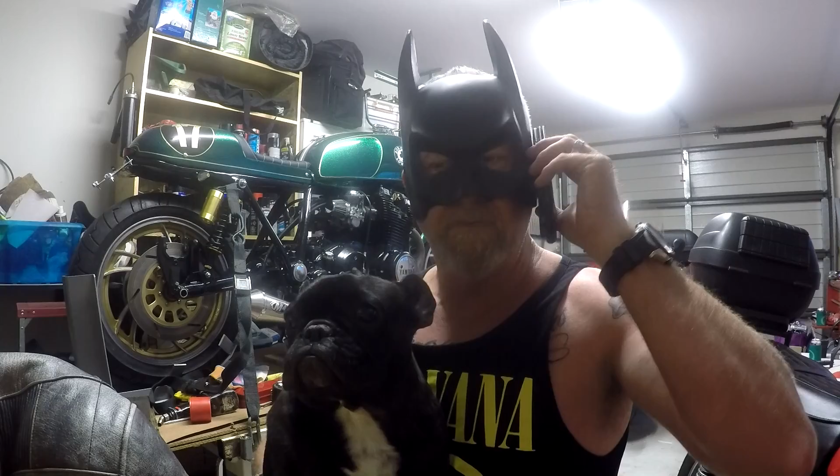No, Commissioner. Enough's enough, I'm sick of it. Bat Dog and I have got work to do. Why don't you ring Brian? He'll just be sitting on a BMW watching his cricket. Yeah, well, of course he'll be pissed. No, that's why you pay those fat donut-eating buggers. No, I'm busy. Bye.

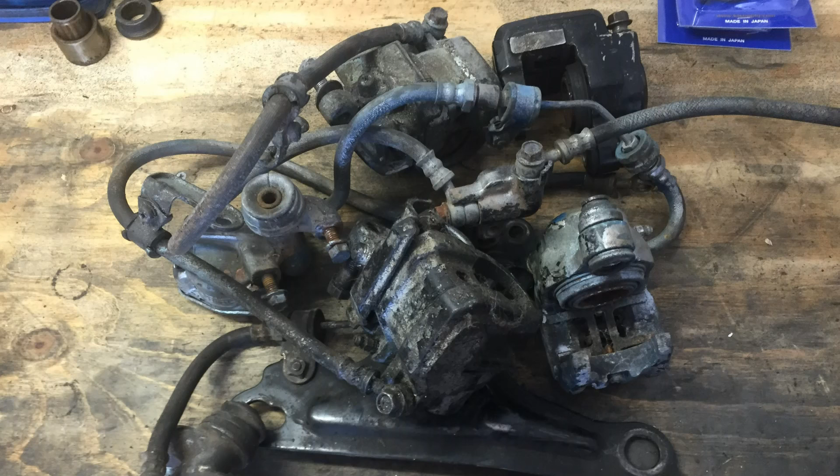Well, we finally dispensed with that clown. This pile of junk sitting on the bench in front of me represents all of the components, or most of the components, that will make up the braking system for Basket Case. Most of it came with the original bike, and some I've picked up along the journey as second-hand bits. I'm going to try and fashion it all now into something that might actually bring the bike to a stop, and I think I'll start with the rear master cylinder.

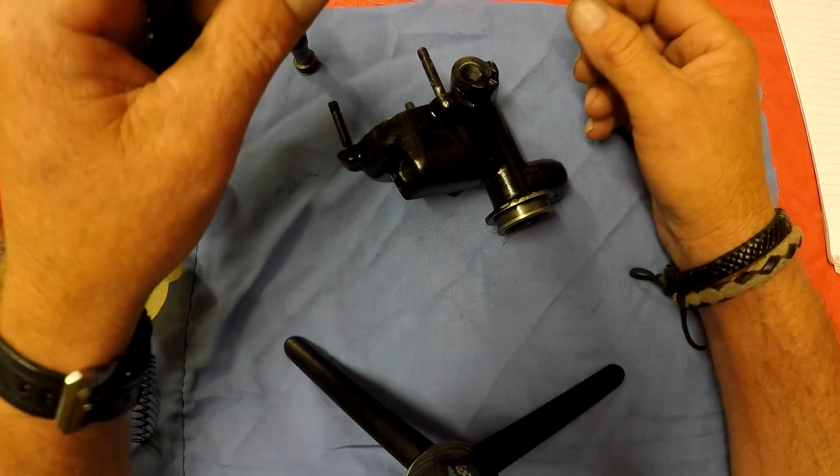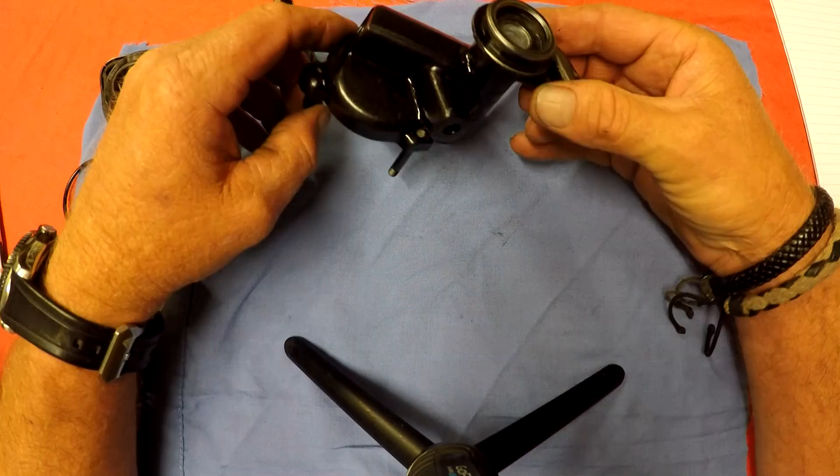Okay, I'm going to start with the back master cylinder. Now, I had two, and this one here I cleaned up. I've painted this, but it was pretty good. It was sealed, it still had oil in it, which is a good sign. The bore was a little bit gangrenous, had a bit of oxidisation, a little bit of rust, and I gave that a bit of a quick clean up just using some 2000 grit wet and dry paper.

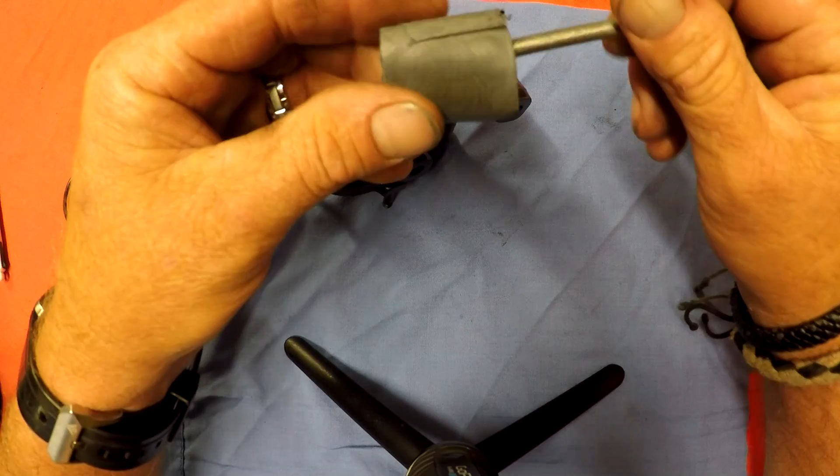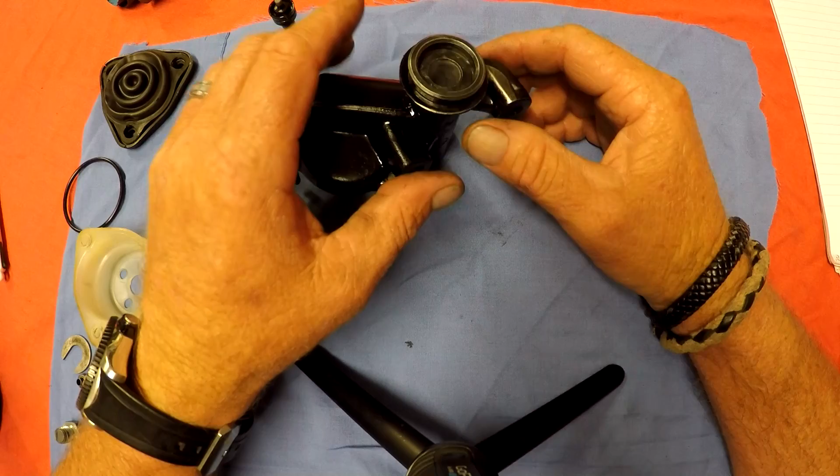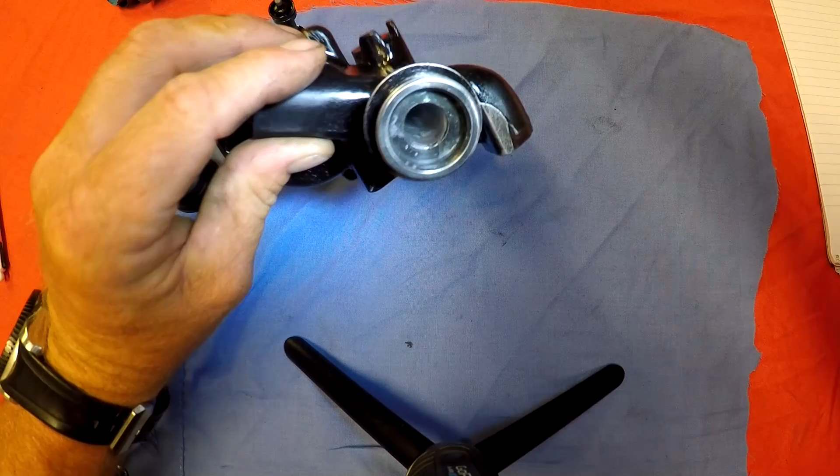I cut a bolt, put a slot in it with a hacksaw. Let's take this apart and show you - with a hacksaw, and just wrap some wet and dry on there for some lapping paper, and a bit of CRC, gave it a good little hone. So that's come up fairly nice now. I'll just give you a look in there. It's nice and smooth, still got a few stains in it, but it's pretty good considering.

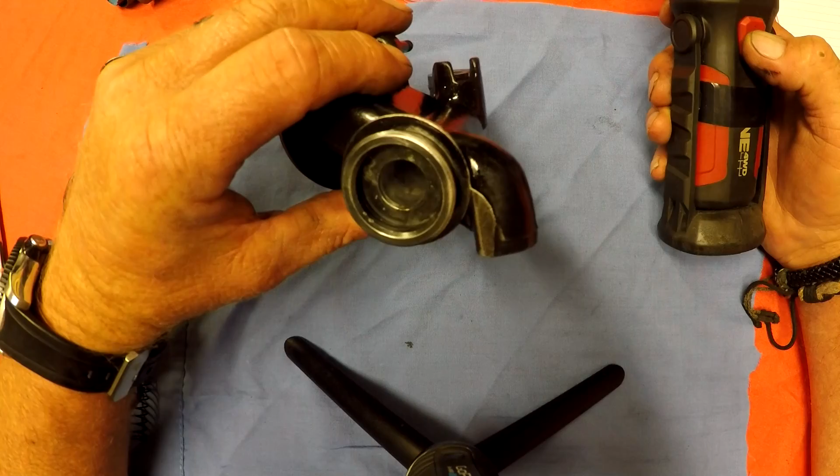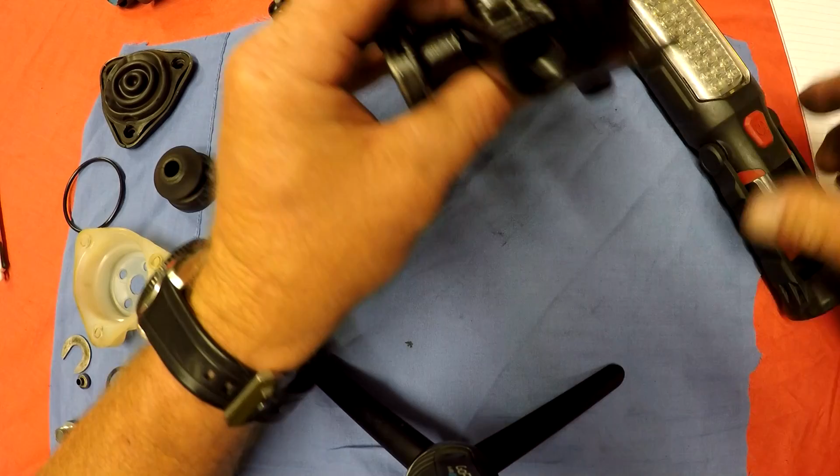It'll be fine to use. Now, quick tip about master cylinders: if I shine a light looking down that hole there, up through the bottom, you'll notice there's two holes in there. Pretty sure you can see both of them.

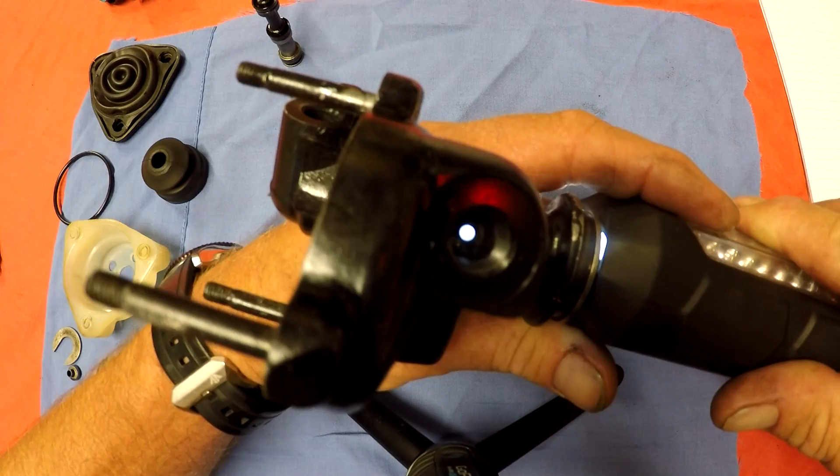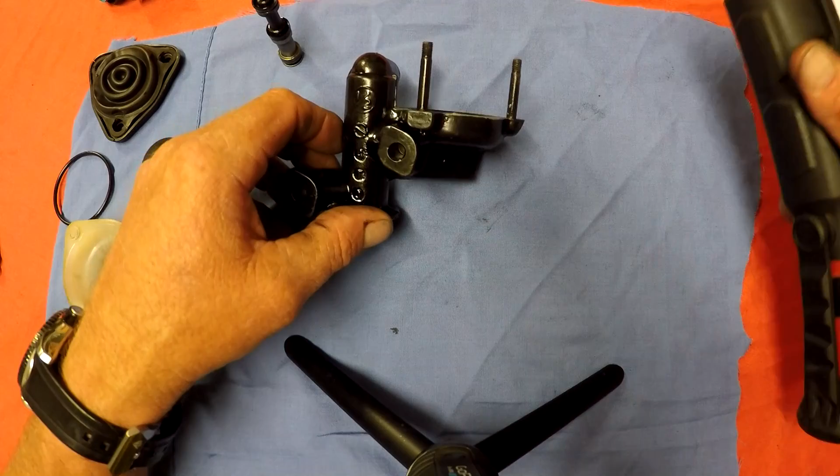One is a large hole, which is used for refilling the chamber, and there's a smaller hole in there, less than 1 millimetre in diameter, and that's the vent port, called by many names, but the Society of Automotive Engineers, SAE, deemed it worthy to call it a vent.

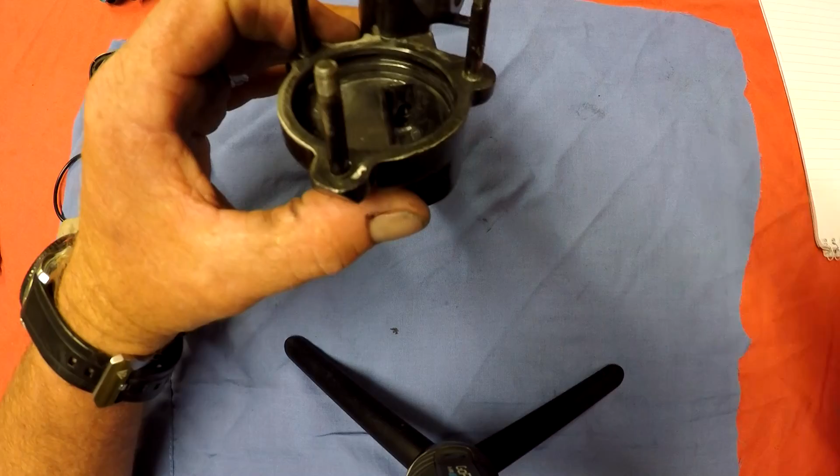So the idea, as he sits down in there - that's the bottom hole of the two that you can see there - if he blocks up, it doesn't allow the pressure to release from your brake, and you end up with a locked up brake. So if that's a symptom you're having, you need to get a guitar string or something and clean it out. The steel guitar strings work well.

So anyway, I'm going to be resurrecting this using second-hand parts because I don't have a kit for the rear cylinder. I've got everything I need here.

Like I said, everything's been cleaned, it's been painted, and the buckets have been curing, or I've been prepping them by sitting them in brake fluid, and they're nice and malleable now. You need to rest them for about 15 minutes in the brake fluid.

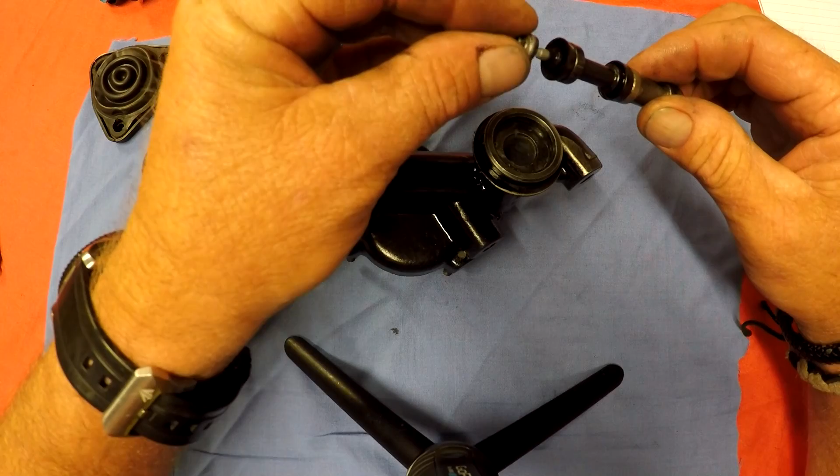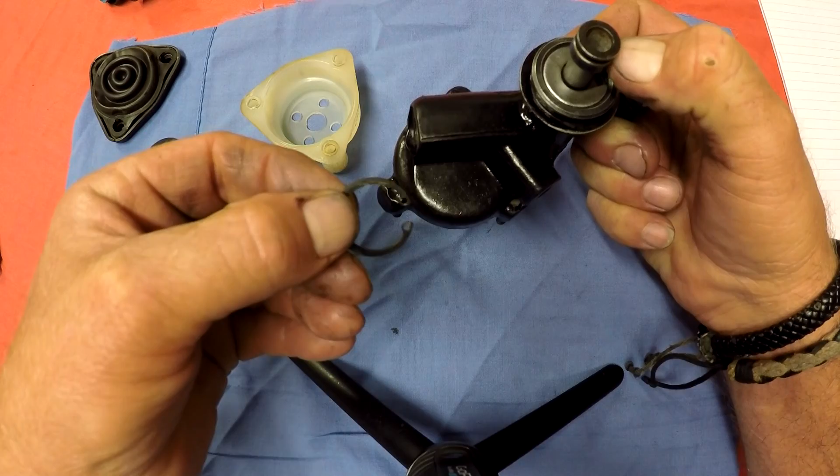So what we have first of all is a spring, and there's a little cap that goes over there. You just sort of gently work the buckets in, so you get them started in the bore, and we pop in a washer and the circlip. Just check that circlip - radius side down, flat side against the load side, the groove.

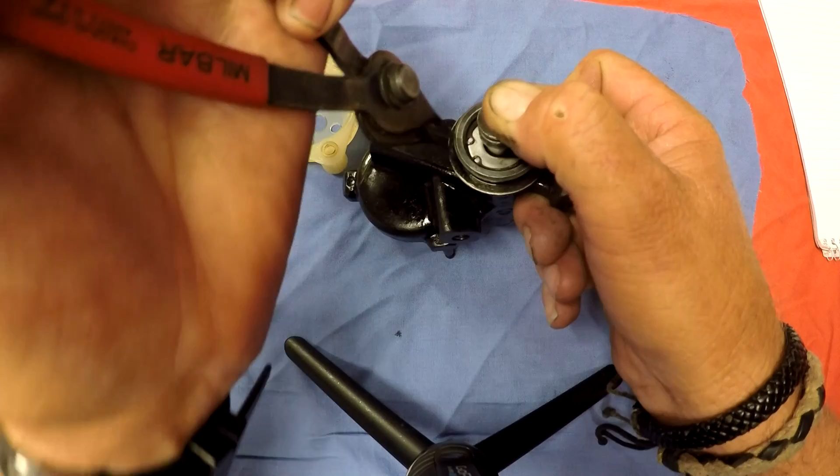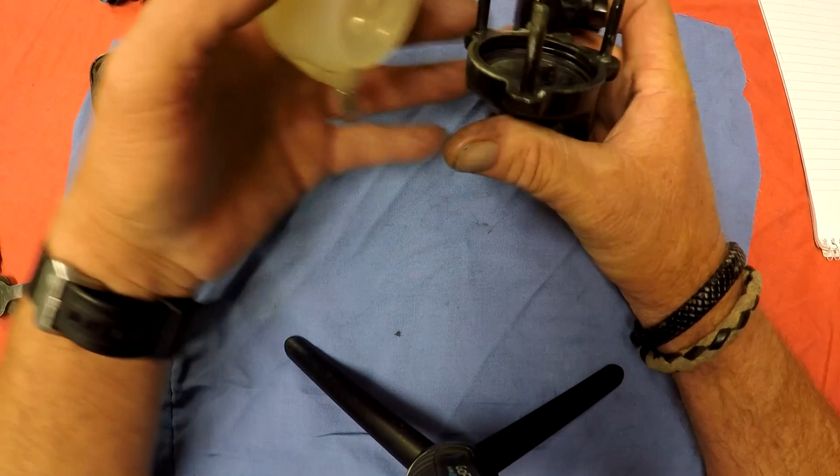There's also a rubber boot that needs to go on, try and keep the road muck out of the system. Alright, so that's the piston assembly.

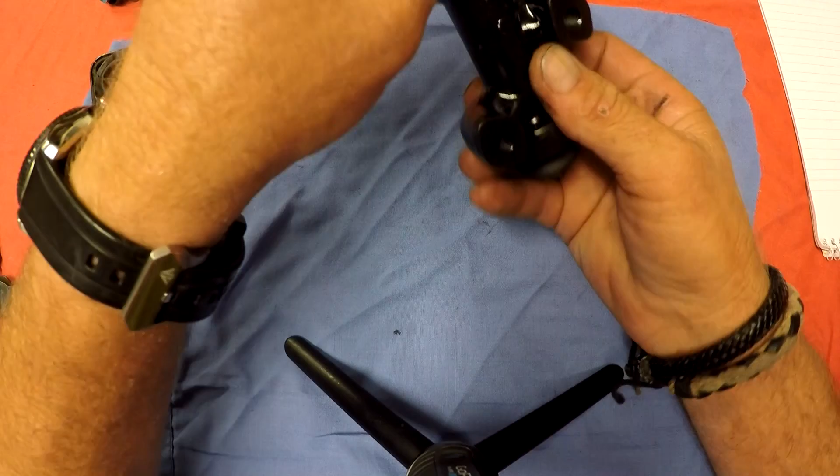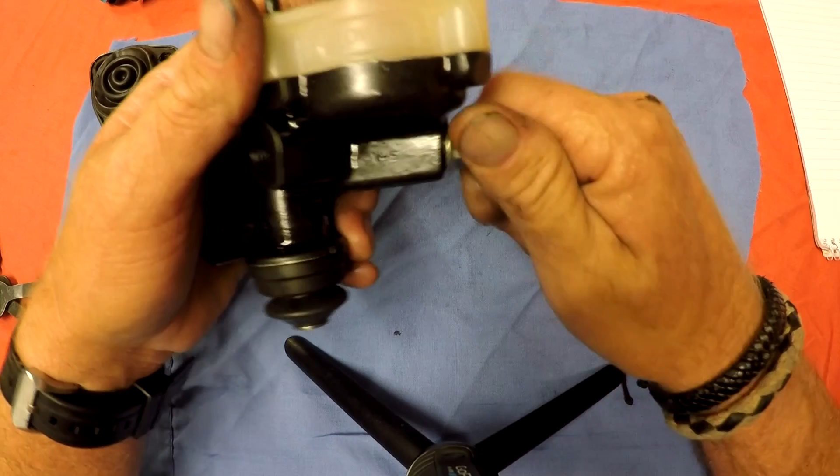This guy, I've also got a little bit of lube on. You just got to be careful that you don't get brake fluid everywhere - the stuff's toxic and it will eat paint, it will eat your clothing. It's a polyethylene glycol mix, and it's highly toxic, so if you're disposing of it, you need to make sure that you do that responsibly.

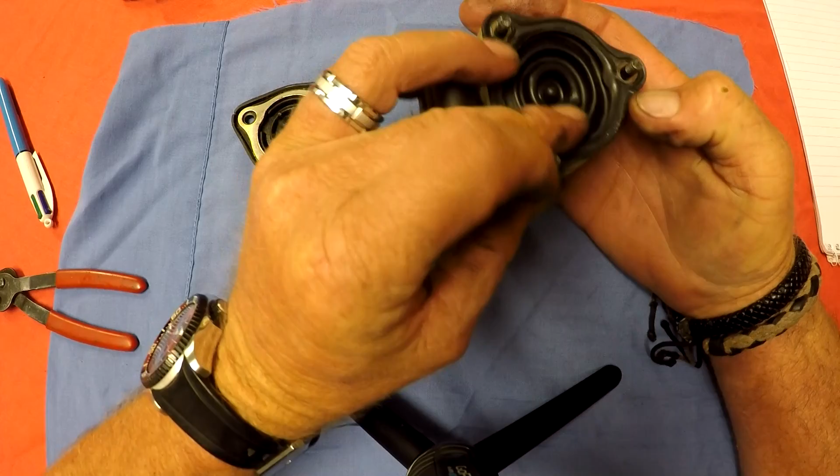Alright, so when this mounts on the bike, it mounts thusly, and I need to be able to read the level indicator, so this guy can go on there. Push him down into the O-ring. Right, it's a little bit proud, but that'll pull down with the cap.

There is also a plug that blocks off the end of this bore here. Just need a 14mm spanner for that.

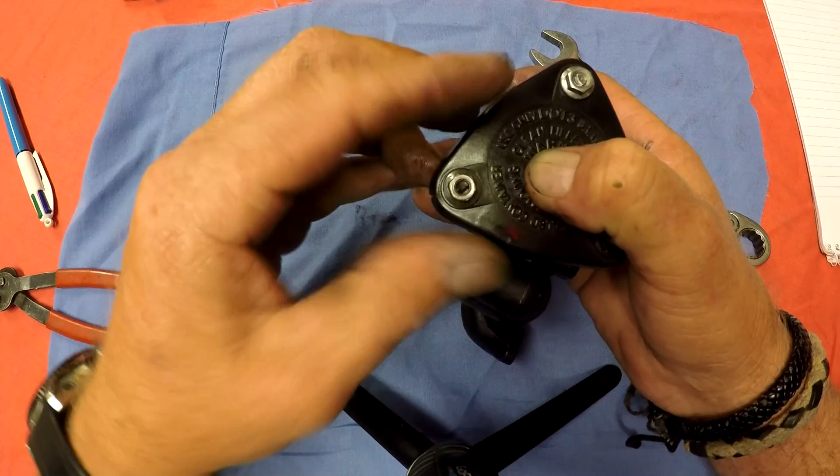And then there's a cap with a rubber seal. This rubber seal is a little bit knocked around, and it looks like it might have been put on there not so carefully at some stage. You just got to be careful that they sit down over those plastic bosses on the lid, because what you don't want is holes like that where you could potentially have fluid leaking out, or more importantly, getting moisture in there.

Yes, just got to make sure they're all down, and they are, and pop the cap on. So that's ready to go, and I obviously need to put fluid in it, and I'll be putting this together with the master cylinder and bleeding it before I mount it on the bike.

Alright, so I just wanted to give you a quick rundown on what makes up the rear master cylinder. Like I said, there's not a lot in them. Let's have a bit of a chat about them. Okay, we'll try and keep this as interesting as we possibly can, I guess.

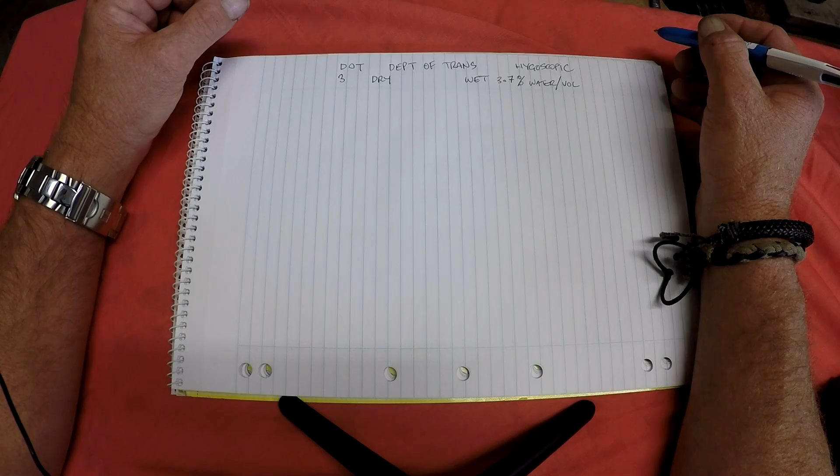So it's essentially the 3 and 4 that you'll see refers to the boiling point. DOT3 has, when they talk about brake fluids, two different types of boiling points. One is a dry boiling point, and one is a wet boiling point. Now, the dry boiling point is essentially brand spanking new fluid in a sealed container, or it's been taken from a sealed container and put into a system.

So it has little to no moisture in it, because this stuff, this polyethylene glycol, is what they refer to as hygroscopic, which means that it will absorb moisture out of the atmosphere, and it does it very efficiently. So, dry boiling point and wet boiling point.

The wet boiling point refers to, well, they had to draw a line in the sand, and they said at 3.7% water per volume is what we're going to measure as the wet boiling point, which means that it's absorbed water essentially out of the atmosphere into the fluid, and at 3.7% water per volume is what they're calling the wet boiling point.

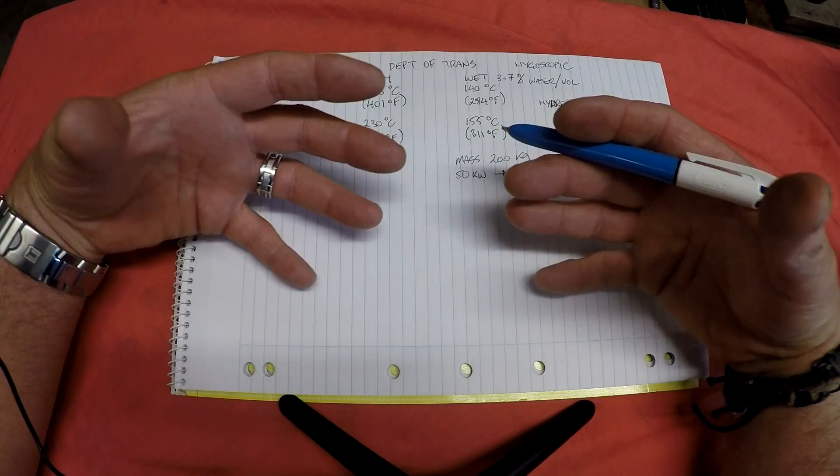And no, I don't have a photographic memory. I actually had to look up these Fahrenheit conversions. So that's DOT3, and when you consider water boils at 100 degrees Celsius, that 40 degrees isn't a whole lot more.

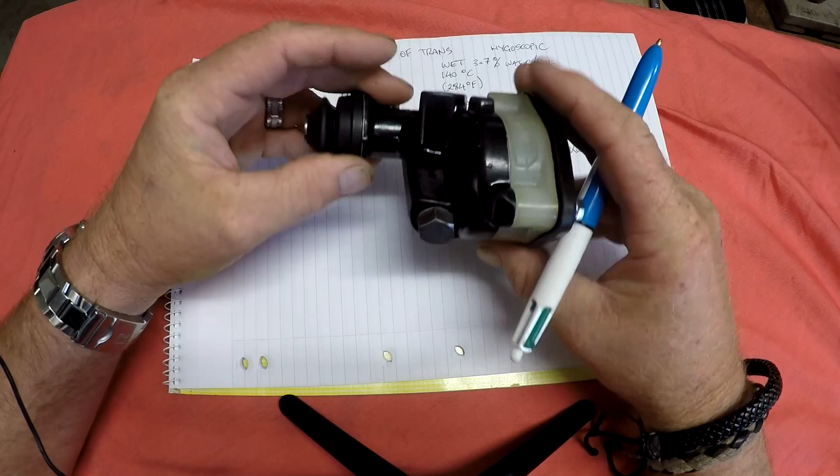We go to DOT4, and DOT4 has a boiling point of 230 degrees C, which is 446 degrees Fahrenheit, and it has a wet boiling point of 155 degrees Celsius, which is 311 degrees Fahrenheit, which is a marked improvement.

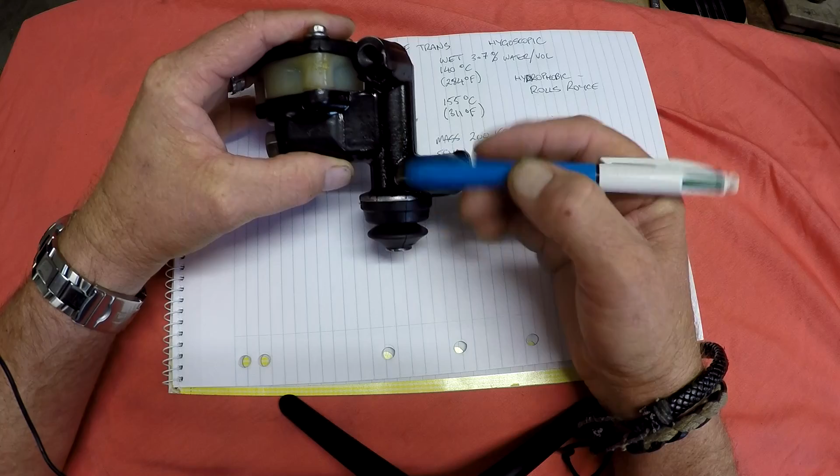You can buy up-spec versions. I think they have some sort of additive, I can't remember what they put in them, but this is a Super DOT4, and it has a dry boiling point of, I did read it here somewhere, 280 degrees Celsius. So that's even better again, and that's what I use in my Ducati. So yeah, that's what all that's about.

There are some hydrophobic fluids, which means that they don't absorb moisture, on the market from people like Rolls-Royce, and very expensive stuff, probably out of the reach of you and I.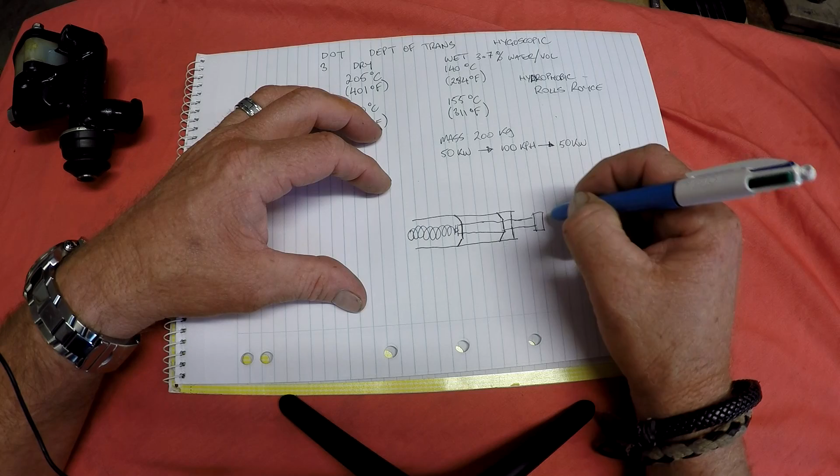So we're sort of going to go down to the local auto parts supplier, and we're going to purchase a brake fluid that is a DOT3 or a DOT4. My preference is a DOT4. I think most vehicles will specify if they need a DOT4, and if you've got some ABS systems that will generate a lot more heat, or motorcycles where the manufacturer believes there's going to be a greater amount of aggressive braking on that particular type of bike, then they might specify a DOT4. Personally, for me, I'll always buy it.

So where does the heat come from? How do we boil it off? Well, of course, we have friction at play.

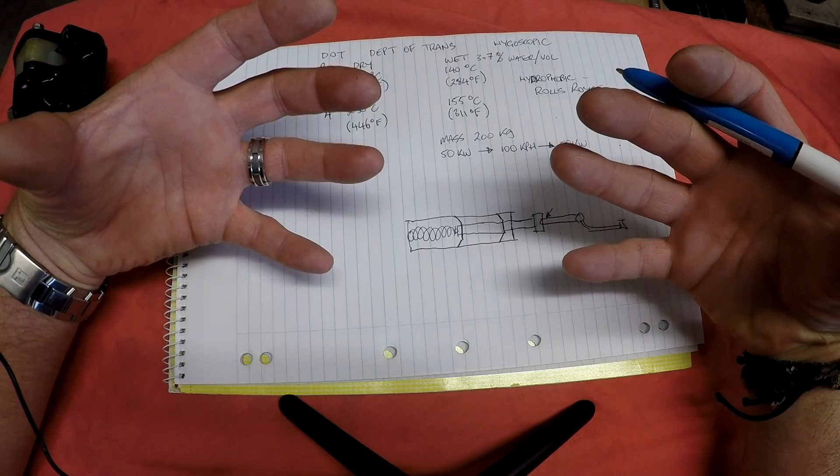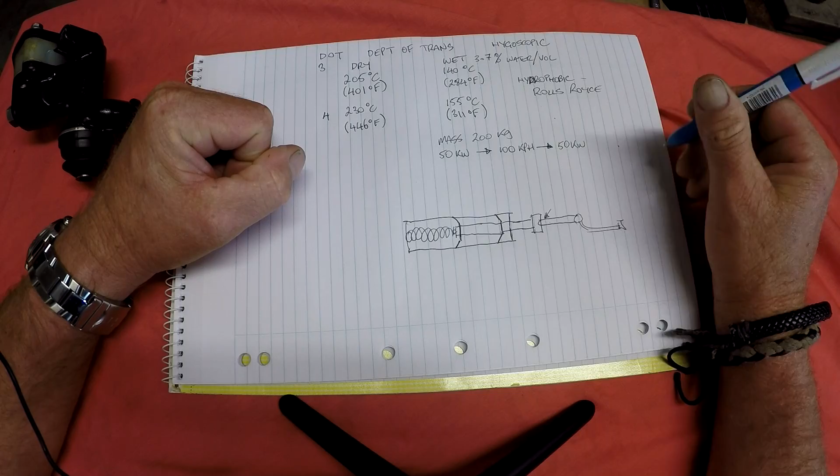So we have a motorcycle which is at rest and has a mass of about, let's just pull figures out of our head here, say 200 kilos. Probably more than that by the time you put a rider on there and what have you, and a full tank of fuel. We want to accelerate that bike up to highway speed. So let's just say, for example, and these are purely figures I'm just pulling out of thin air, just say we need 50 kilowatts of power to accelerate that bike from rest to 100 kilometers per hour.

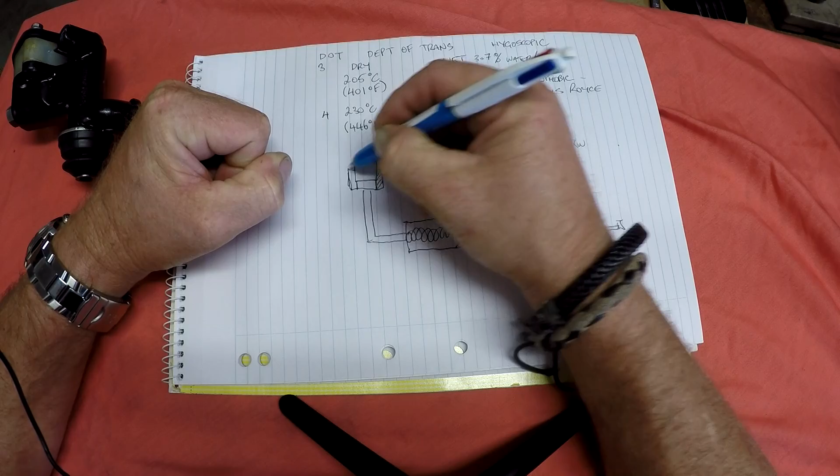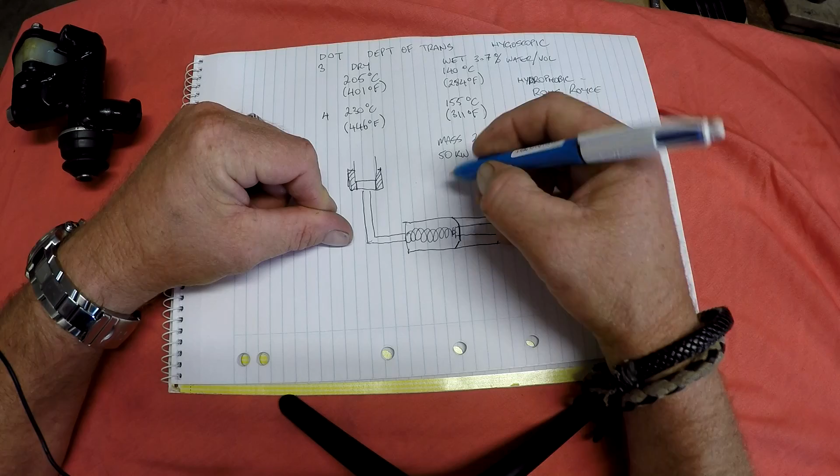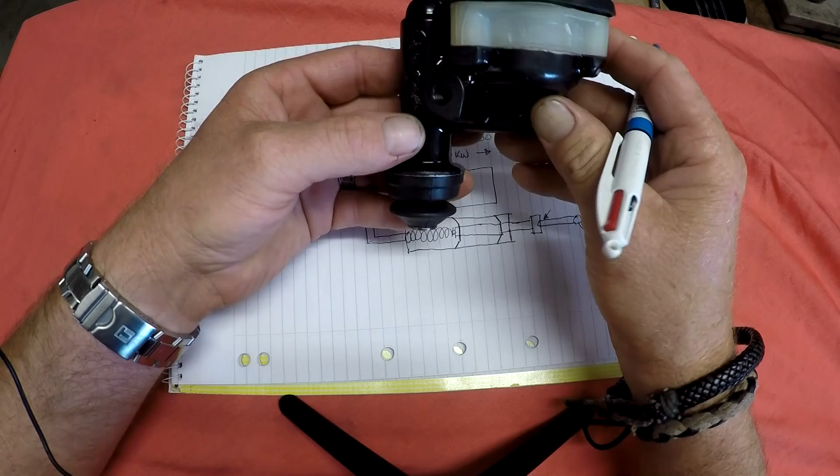If we wanted to bring that bike back to rest again, down to zero, we would have to apply 50 kilowatts of power to bring it back down to rest in approximately the same time. So that energy we apply, that 50 kilowatts of friction energy, is transferred into heat, dissipates mostly out through the wheels and the caliper. The disc rotors out into the air and is cooled, but a good portion of it is put back into the fluid and it heats up.

So it's probably enough waffle about brake fluid. But we need to talk about master cylinders, which is this guy here.

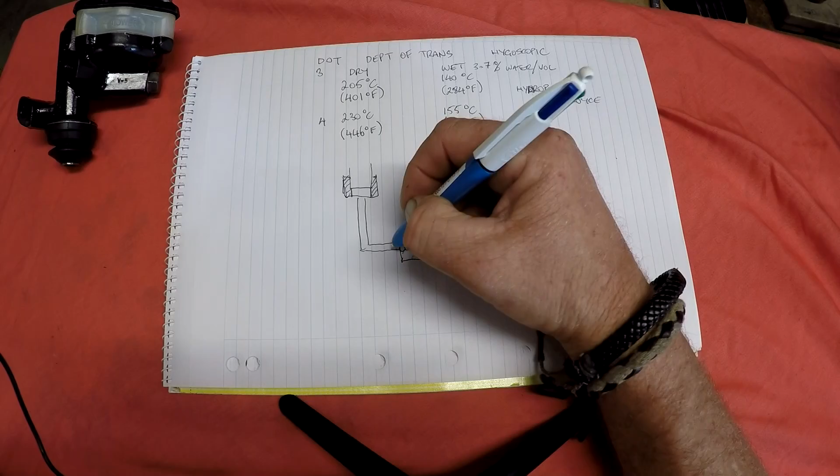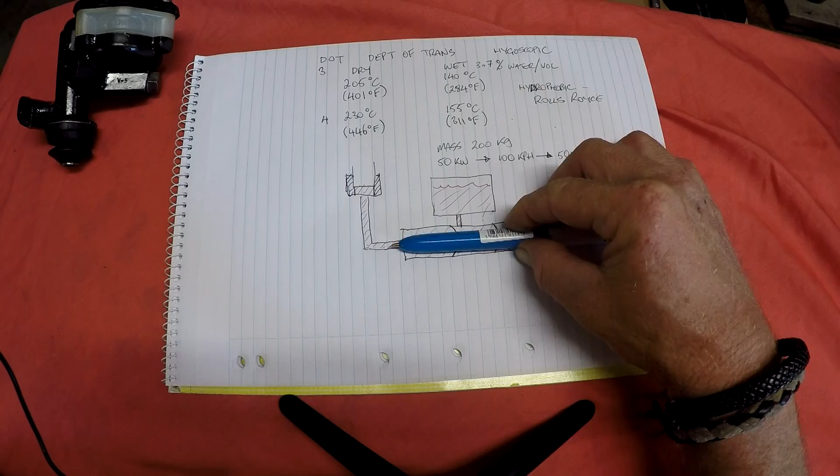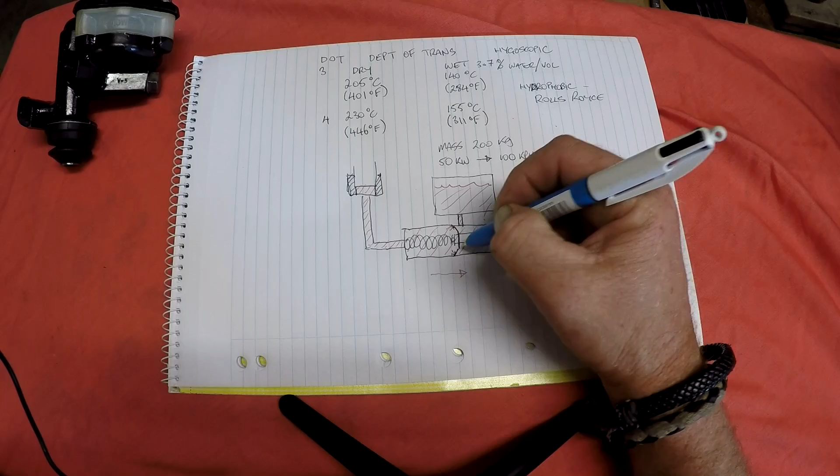The oil sits in this reservoir and floods into a chamber, and we have a piston that operates up and down in here, which we saw during assembly. That bore, that cylinder the piston operates in, sits thusly, and inside there we have our primary piston seal, which is a cup seal, attached to a piston. In the case of the XS1100 and a lot of other motorcycle master cylinders, there's a second cup seal, and the piston then extends. There's some way of retaining the unit, in this case a circlip, inside the chamber so it doesn't fly out, and we call that assembly the piston assembly.

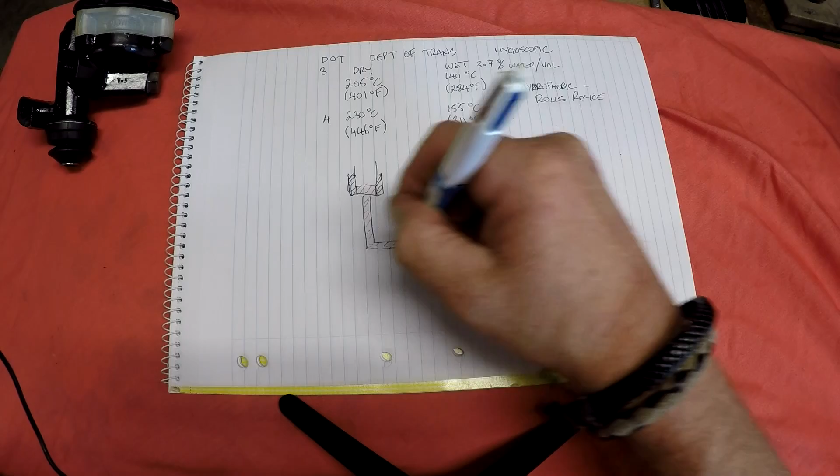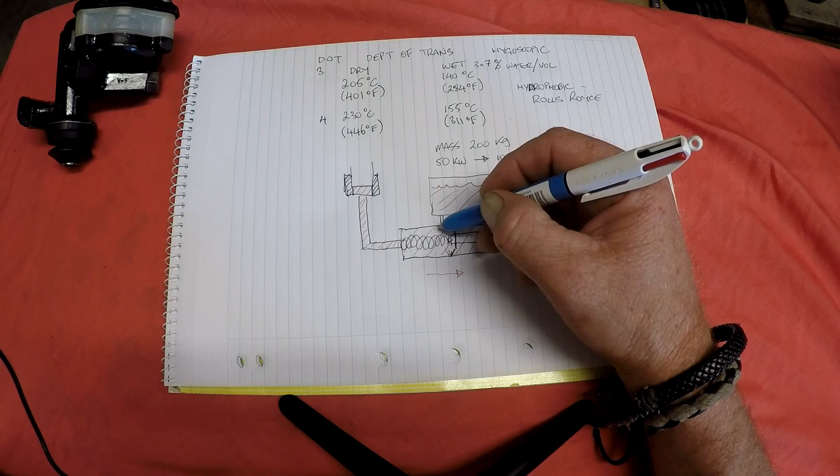On the other end of it we have a spring, and the spring's job is to bring the piston back to the rest position. The rest position is very important. On the back of the piston assembly you'll have a plunger, some method of depressing it, and there'll be a brake pedal fastened onto it. It's important that you have free play set at that point where the plunger meets the piston, and I'll explain more about why later.

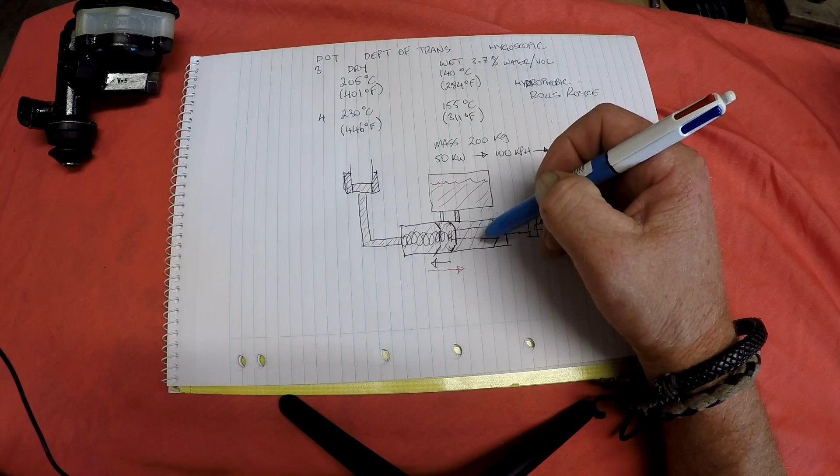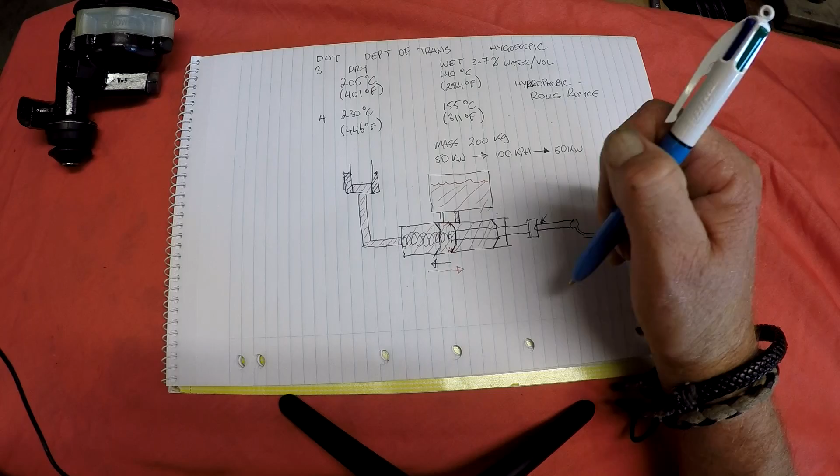So essentially, when we talk about hydraulics, technically hydraulics is water-based systems, but since Archimedes there's been a lot more discoveries, and people have developed better products than water for these types of systems, which water would be next to useless for. So we've got fluid of some type, in this case brake fluid, sitting in our master cylinder, and it's plumbed to a caliper, a brake caliper.

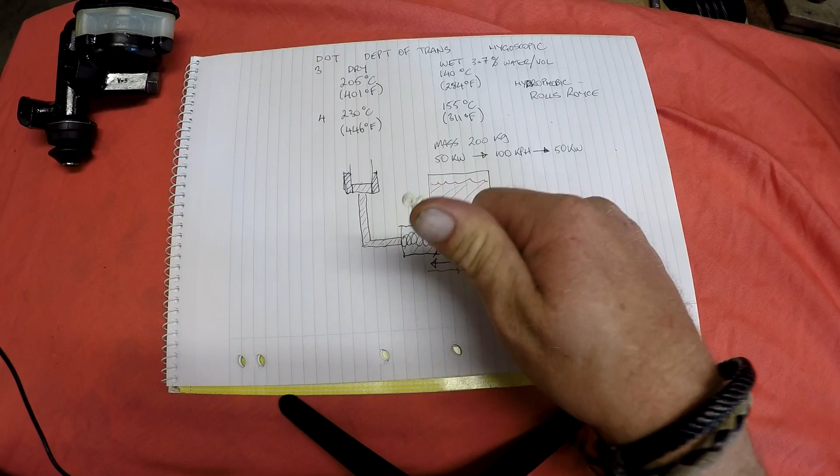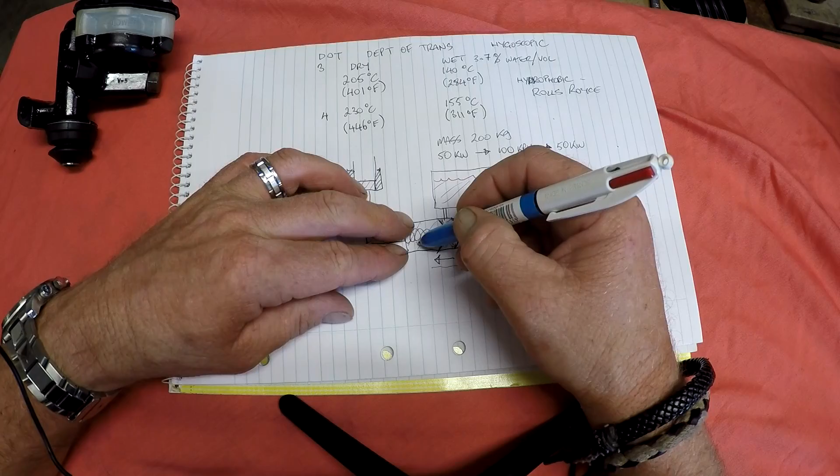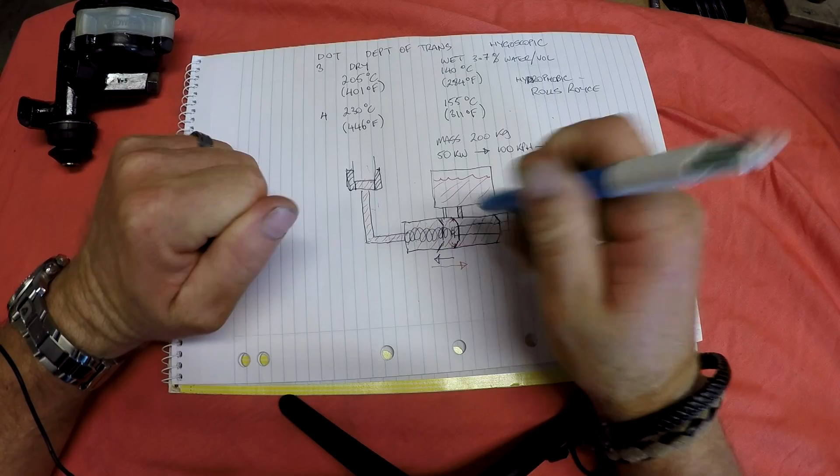Our brake caliper contains a piston, thusly. Sitting above our cylinder here, we have the reservoir for the fluid, which sits up here. Now this particular one's cast as part of the assembly. Some of them are remote mounted and have a hose going down, but all systems like this will have a reservoir, and they have a replenishment port that in the rest position sits behind the cup. In fact, during the whole operation it sits behind the main cup seal.

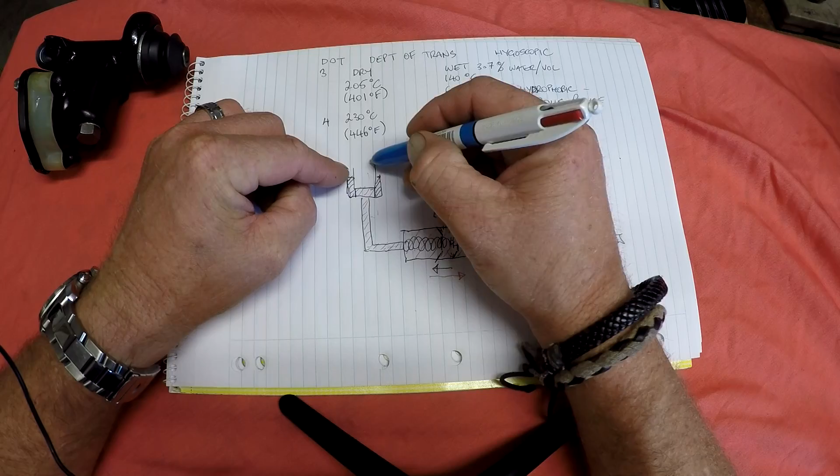So your fluid sits in here inside the reservoir, and it is completely flooded in the chamber, and through the pipe or hose. Because we've got a swing arm and a set of forks, we need to have flexible hoses running down to them. So that whole system is chock-a-block full of fluid.

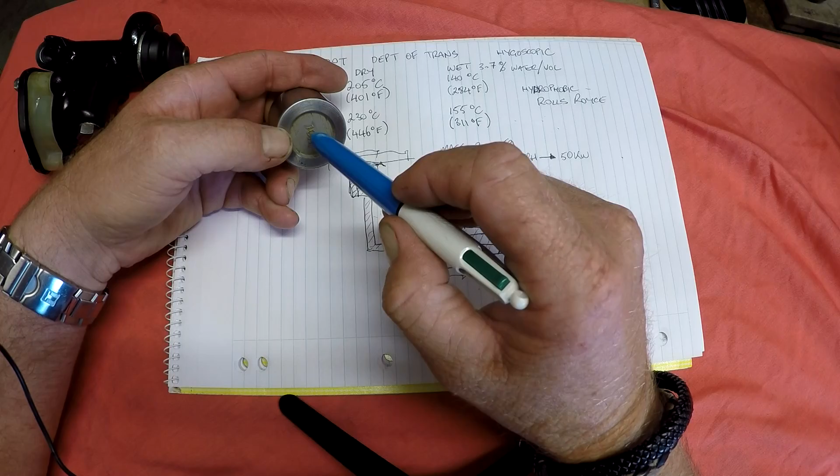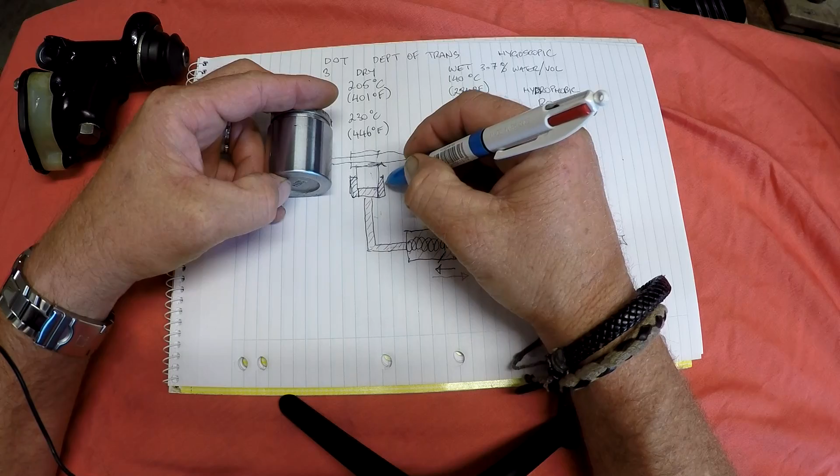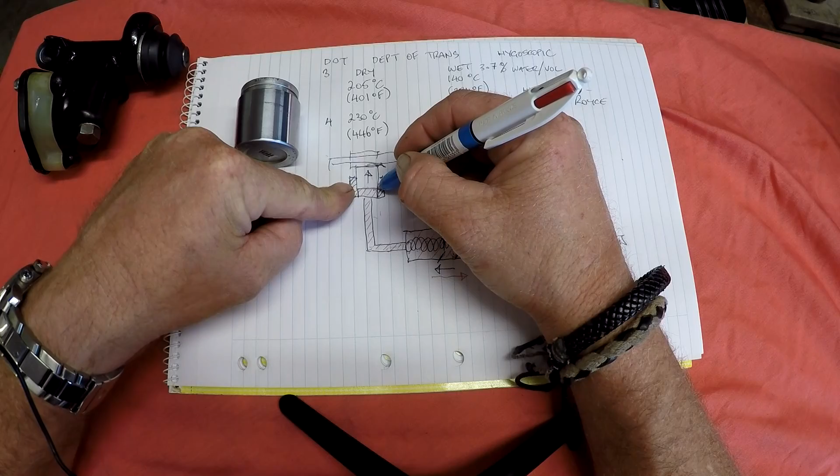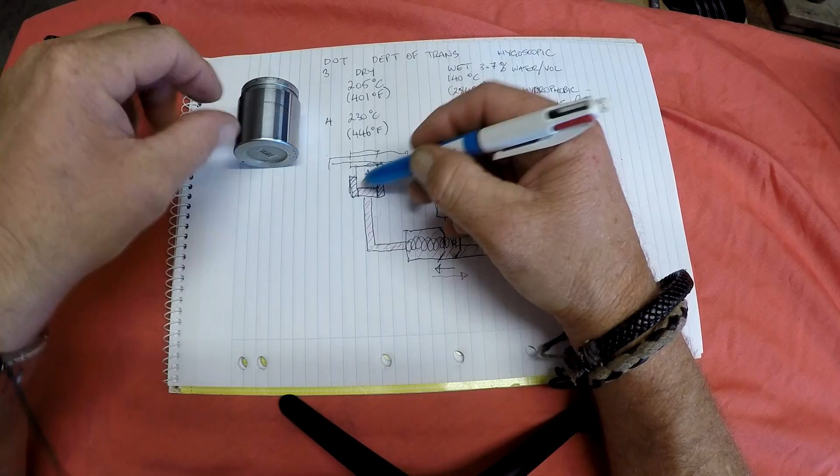And this cup seal here just works as a piston pump. So it travels through the fluid in that direction, and as it does, the fluid pushes out onto the edge of the cup seal and helps create a seal between the cylinder wall and the piston. Then when the piston assembly is travelling back again, the oil is able to escape around the top of the cup seal, so it just moves back through the fluid, and it just works as a piston pump, boop, boop, boop, just pushing a volume of oil that moves back and forward. On the other side of the piston is that small compensating port.

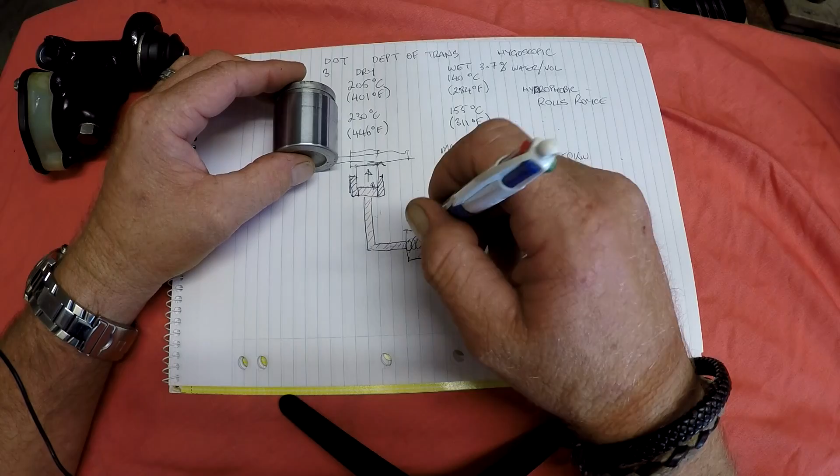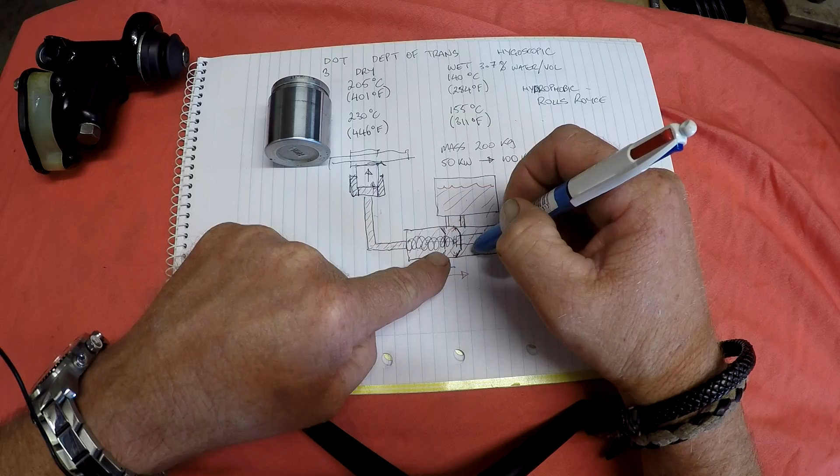Or as the Society of Automotive Engineers have deemed to call it, the vent port. Now, when the piston first starts to travel, the cup seal will pass that vent port, and the minute it does, you start to build pressure in the system, because it's now completely isolated.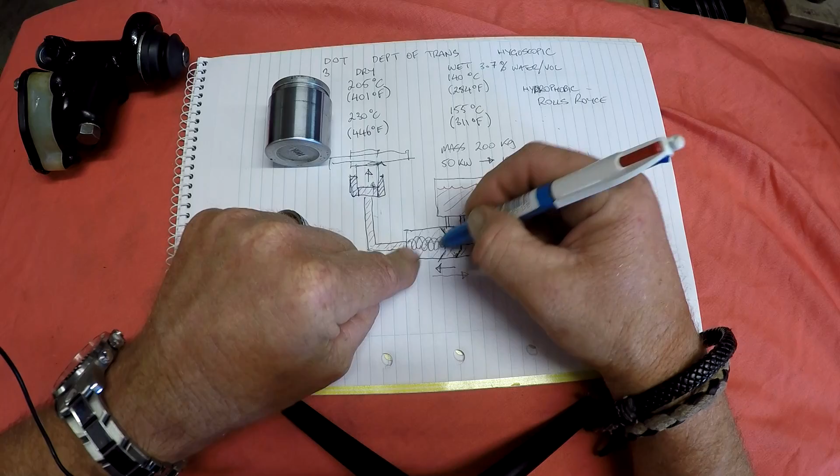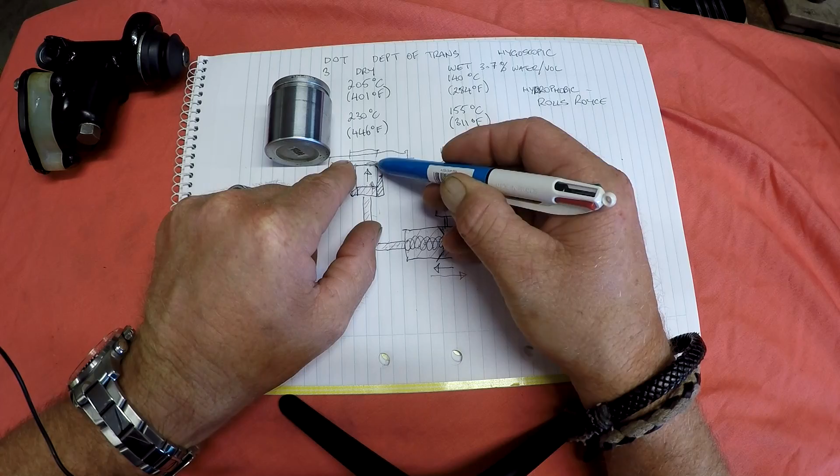Once it's in this position here, it's travelled forward. It's completely isolated from the reservoir. The oil that's in the back here will just move up and down, very minuscule, you won't even notice it. But this area here behind the main working seal just remains at reservoir pressure. Whereas on this side it's the high pressure, so you're pushing the oil in that direction and it all moves through the system up to the piston.

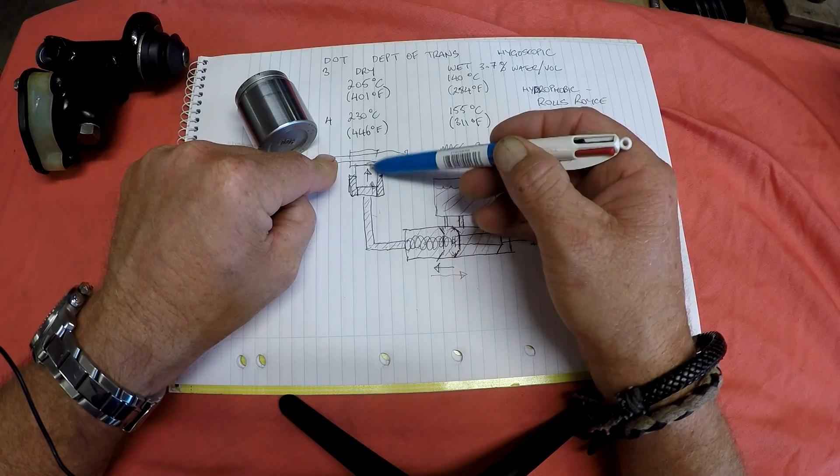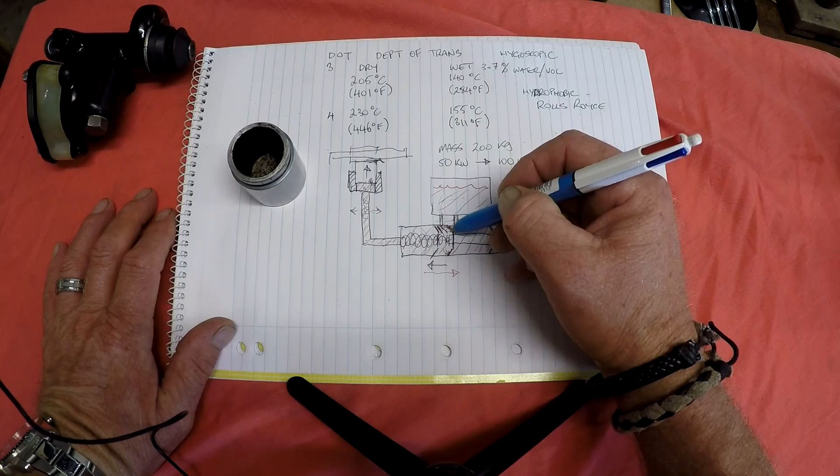Now, Pascal's law states that if we have a non-compressible fluid in a confined system, such as this, where it can't escape, and we apply a force, that force will be exerted in all directions in that system evenly and undiminished. So whatever we apply here will be pressing on the walls of the tube, on the bottom of the piston here, inside the tube, and on the seal itself. So that force we apply is undiminished and even right throughout the whole system.

So that means that ideally you'd have a solid steel pipe here, because you get no reaction from the force. Whereas with rubber tube, etc., you can get expansion, and that can absorb some of the energy that you should be putting into your brakes.

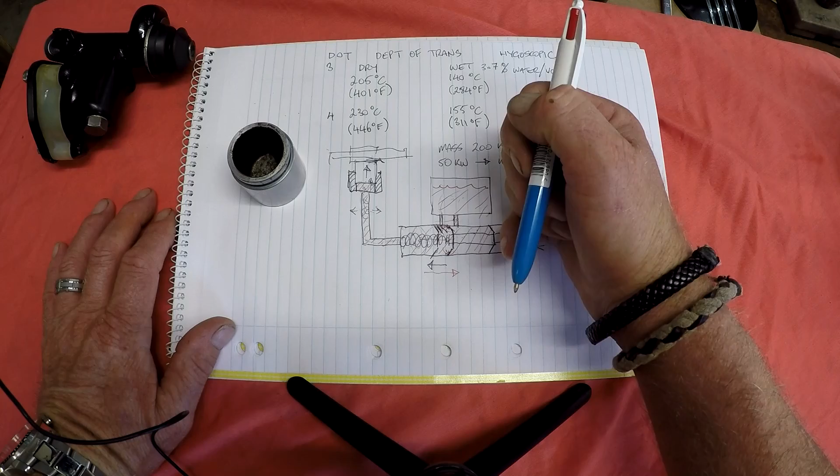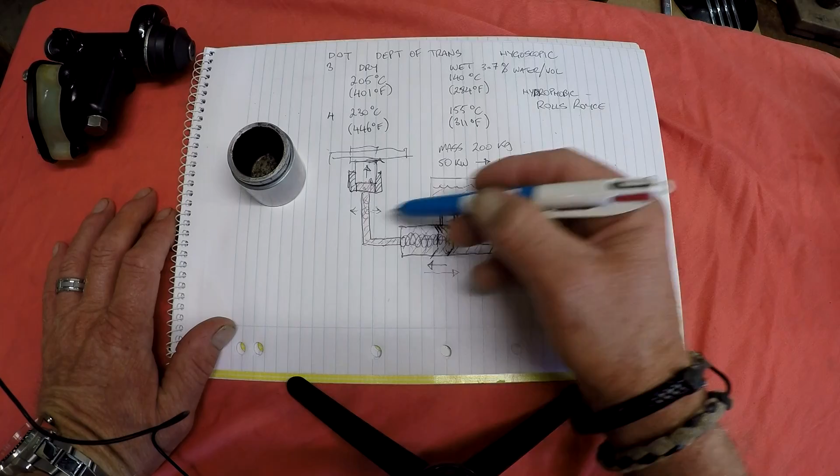So we know that whatever force we apply here is going to generate elsewhere. But manufacturers are clever, and they build in a force multiplication where you have a smaller diameter. This is only about 1/2 inch diameter bore in here with these little cup seals, and it doesn't take a lot of energy, a lot of effort to make that move inside there.

And we need to be able to apply quite a bit more pressure to our brake rotor, which runs through here. Our piston and brake shoe sits in there, and another brake shoe sits on that side. It has a clamping force.

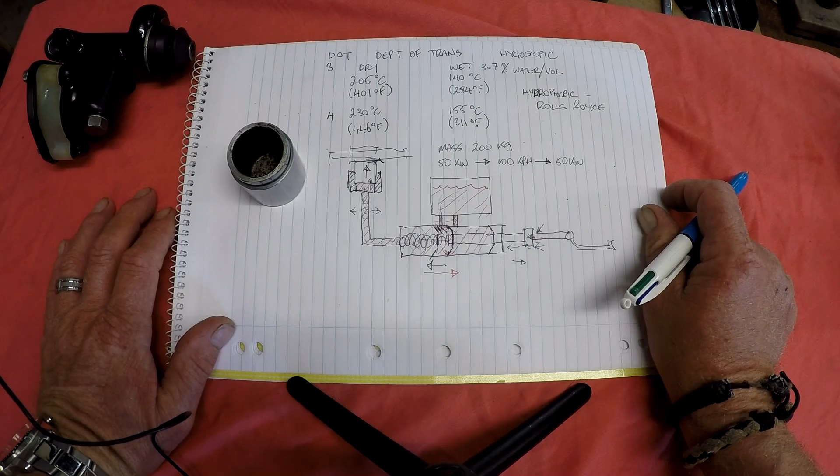So in order to do that, what they do is they build a bigger diameter at this end. This larger surface area has the same amount of force acting on it, but instead of acting on a little 1/2 inch piece like in our piston here, it's acting on a much larger area, and that generates greater force at that point. Pressure is the same as here. Force is greater because it's multiplied across that face.

That means you put a little bit of energy in here and you get a better result there. Because it's a volume of oil that we're shifting, and this is a bigger diameter, the distance that we travel here will be greater than the distance that we travel here for the same input. But what it does do is it transfers that into a greater force. I hope that makes sense.

So now we've got a high pressure side and we have a reservoir pressure side, and we're keeping the oil from leaking out of the bottom of our piston with our second cup seal here. And we release the brake. So what happens then is the spring reacts and pushes the piston back to its rest position in between those two ports. And the minute it passes this compensation port or vent port, the pressure in that system equalizes with the reservoir, so it lowers and allows that to relax.

You only need a gnat's hair clearance on your disc rotor, and you no longer have friction. So that will probably sit just off there. If you've got discs that aren't parallel anymore, they're warped, or you've got a wheel bearing that's flogged out, you get what you call brake knockoff, where the disc will actually smack